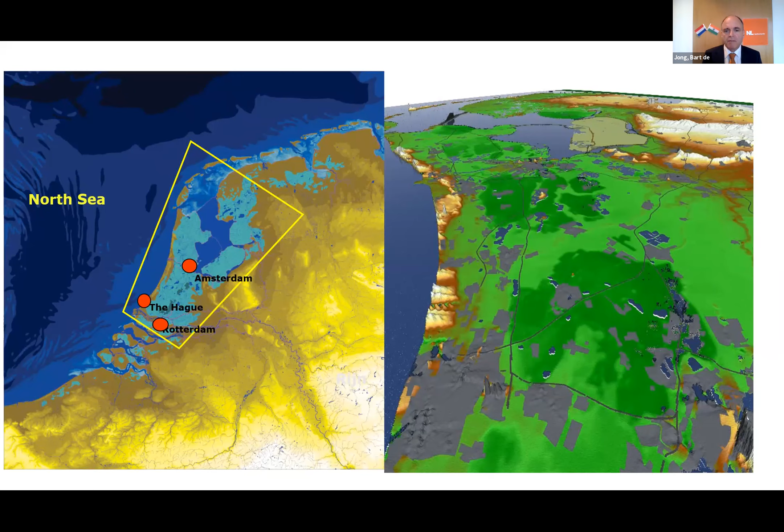As I said, the blue areas are below sea level. And if you see in the next slide what our country would look like if we hadn't done sea defenses for over 1,000 years - we've been doing that for over 1,000 years - the country would look like this. It would be flooded for one third of the country. That is an alarming notion, of course, but the thing is, it's not flooded.

So that means flood protection actually can work. And you're going to hear all about the way we've done that through the ages from various colleagues present here today.

I think we can move back to the main screen again, Ram. So if you see that picture, and add to that what the picture would actually be if we didn't have any flood defenses - climate change is exacerbating that problem, not only because of sea level rise, but also because we have much more rain falling in a very short period of time, and also because of higher river discharges. So we need to find solutions.

We had a major disaster in 1953. That was our last major flood, which cost about 2,000 people their lives. That was actually a turning point in our thinking about flood control. We started building these large infrastructural works, delta works we call them, that the Netherlands is known for.

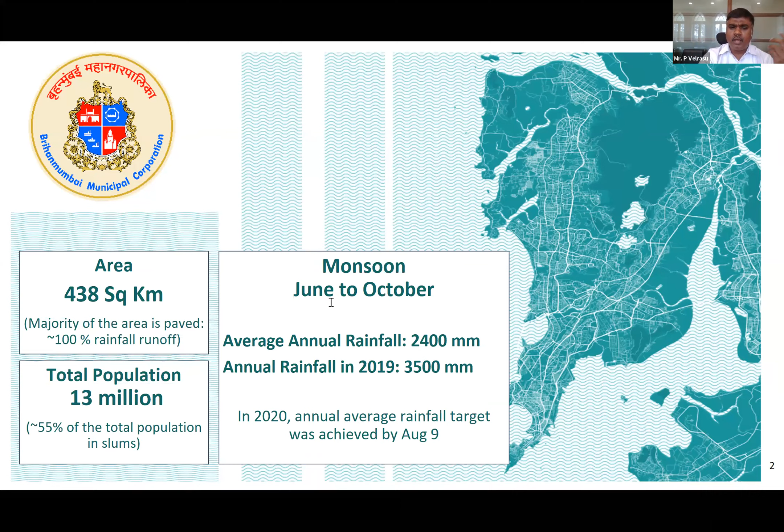We get a lot of our flood from the rains. The rains happen between June and October, and we get about 2400 millimeters of rainfall, sometimes up to 4000 millimeters. Incidentally, Mumbai is also reclaimed land because most of the places are filled up. Originally there were 6 islands, so the idea was we filled the land and formed a huge land mass. That is where the similarity with the Dutch lies.

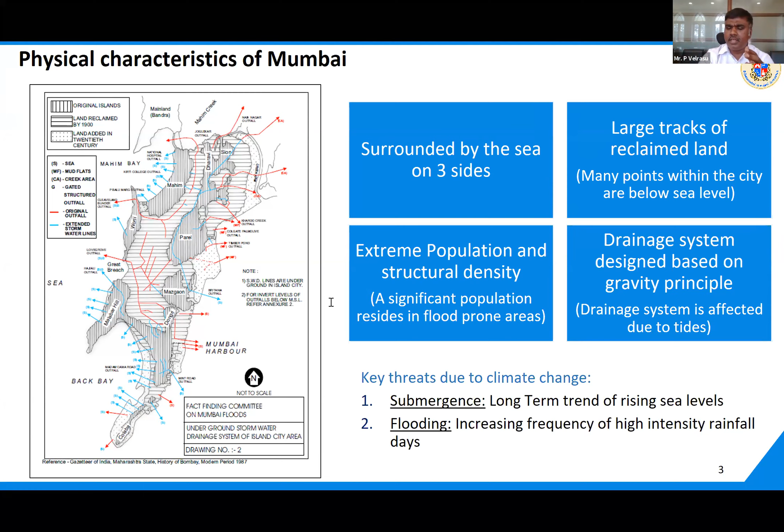If you see most of our water draining into the sea, these are all gravity based. Until recently, we have not put any pumping stations. So the Mumbai flooding problem is basically because of 4 rivers, and when these rivers drain water into the sea, if there is a high tide, the water doesn't drain and it floods the city. So we have 4 rivers, like you have the Rhine or Meuse and other rivers.

We have the Dahisar, Poisar, Oshiwara and Mithi rivers, and these drain water into the sea. If there is a low tide, there are no issues, but if the tide is high, the water doesn't discharge into the sea, creating flooding in the city. So this is a problem. Our systems have been designed only for 25 mm of rainfall in an hour.

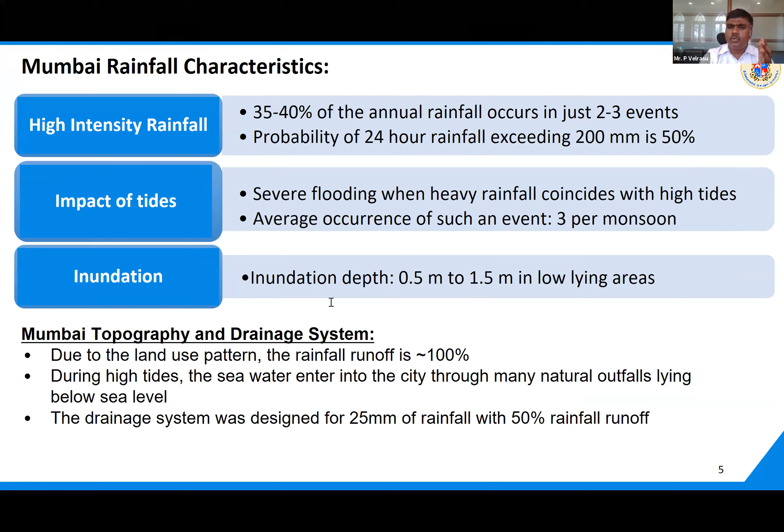Now, under global climate change, we see more than 200 millimeters of rainfall in 1 day. So basically our systems are under-designed for the kind of extreme events we are witnessing now. For example, last year we witnessed more than 200 mm of rainfall in a day, for more than 3 days. These are the extreme events happening due to global climate change, and our systems are not designed to handle those types of extreme events.

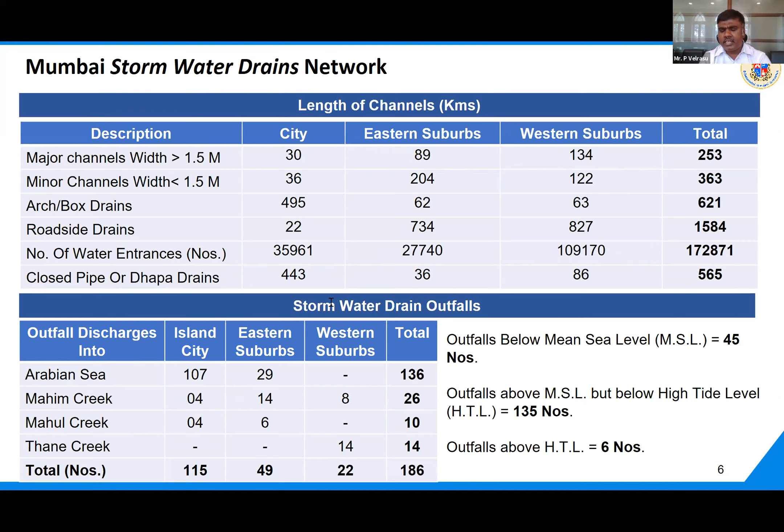Mumbai has a large number of channels which merge into the rivers, and the rivers get into the sea. We have about 186 outfalls, the drainage points, out of which, excepting 6, all other outfalls are below sea level. Meaning when the sea is full and there is a high tide situation, all these outfalls will not let the water go into the sea, so the city gets flooded.

So we had a plan with us in 1989, called the BRIMSTOWAD report. This is the base map on which we build our systems.

We assumed the runoff coefficient as 0.5, whereas in practice it is close to 1. So this was going on for some time.

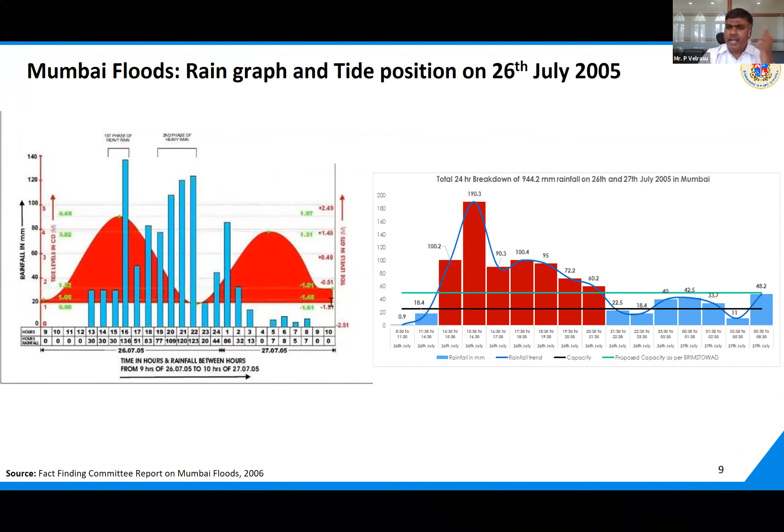Then in 2005 we faced a major flood, when extreme rainfall coincided with high tides. That day the whole of Mumbai went under water. Many people died, and everything came to a standstill.

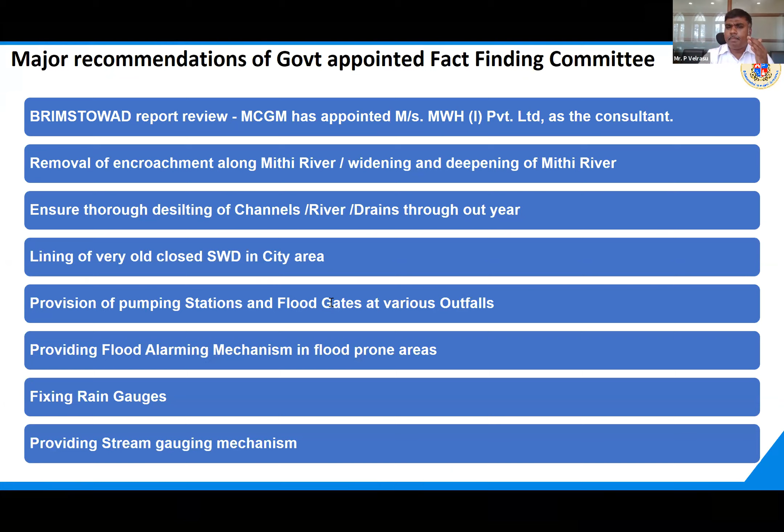So what happened then? The government, as usual, appointed a committee. Again we studied, and again the solutions were very normal: we had to widen the rivers, deepen the rivers, and remove the people occupying those banks. All these solutions were given, and these formed the base map on which we are working our solutions.

So this is how the methodology and all the details are there. But what we are seeing in the last 4 or 5 years is that extreme events are increasing in number. Five years back we didn't see much of these extreme events. Last year we got 3,500 millimeters of rainfall, almost twice the usual rainfall in Mumbai city, and on 3 days we had more than 200 mm of rainfall.

So all these events only strengthen the belief that in future, the risk because of climate change, as well as the rising sea level, is there for us to face.

So what we do: we have 6 huge pumping stations. When the sea water level is high, we put the floodgates up, but whatever water is getting collected from the rainfall, we pump out into the sea. So we have 6 places.

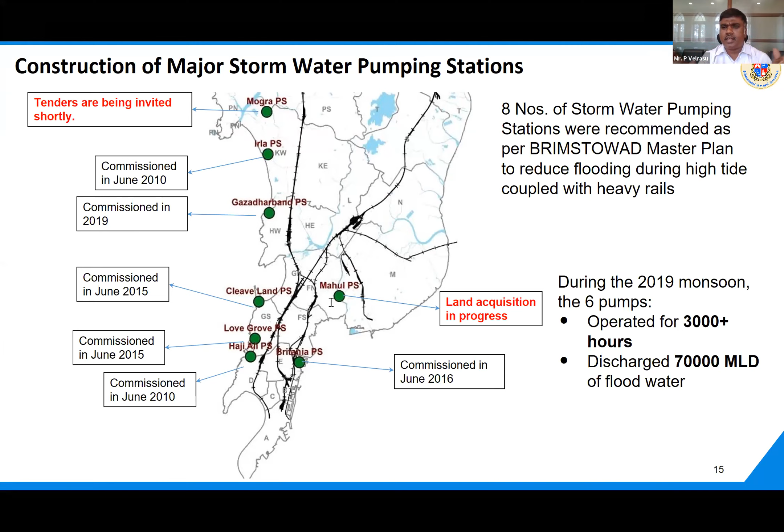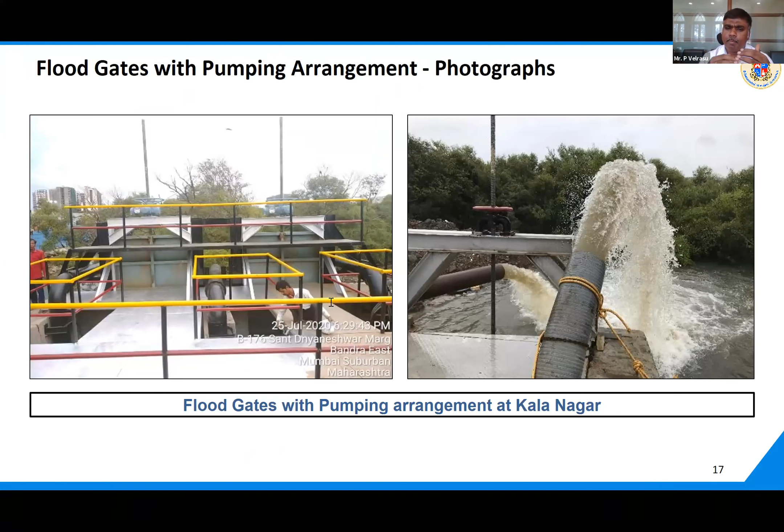It is already in working stage. 2 places we are yet to construct. So to say, these are like our delta structures — for our scale, even though they may be small. So these are the pumping stations, and at many outfalls we put these flood gate type arrangements to pump out the water into the river and into the sea.

And every year we remove almost 500,000 metric tons of silt from the rivers and other big channels to have a good flow into the sea. This we regularly do.

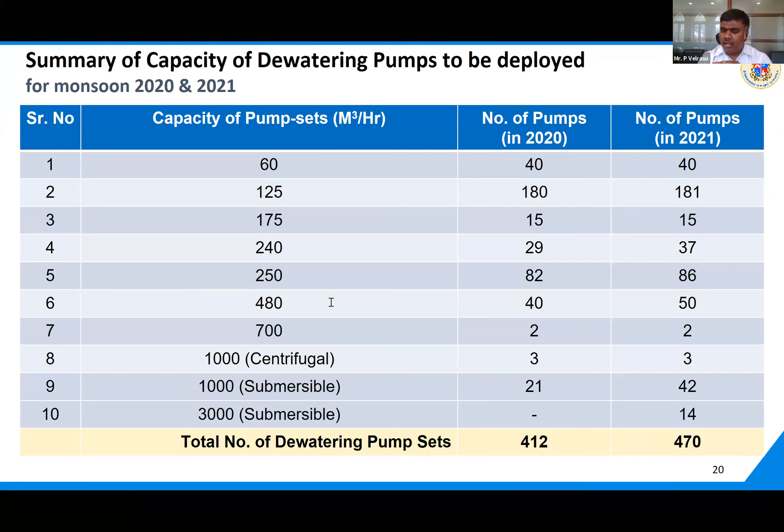Then, in spite of all this work, we have about 400 points that are lower than sea level. We get water stagnant here, so we have to put pumps and discharge the water into the nearby channels and rivers. That also we do.

So in spite of that, we have about 400 small flooding spots in different parts of the city. Every monsoon it happens. We have already tackled about 170 places using engineering solutions, and the remaining places are in different stages of tackling.

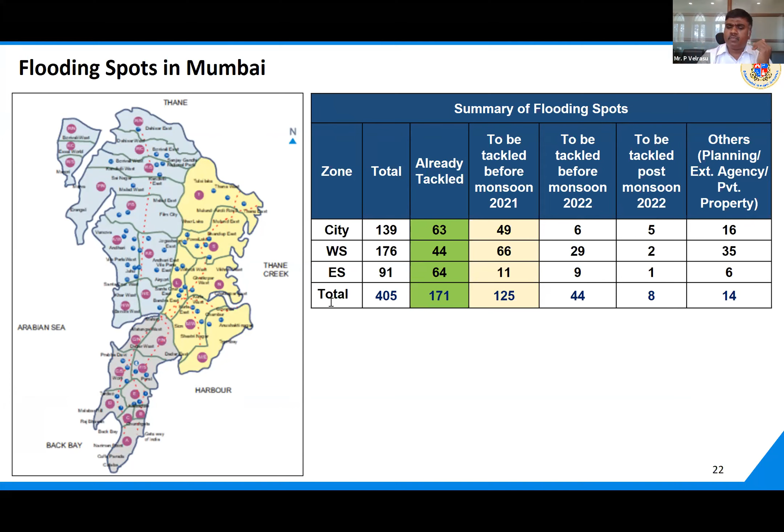Now this is based on the Tokyo tunnel model. Here, these are some chronic spots where we are building huge underground floodwater holding tanks. This is the first time we are doing this, this year. We have taken this work in 2 places on a pilot basis — we want to execute in 2 locations and learn from this.

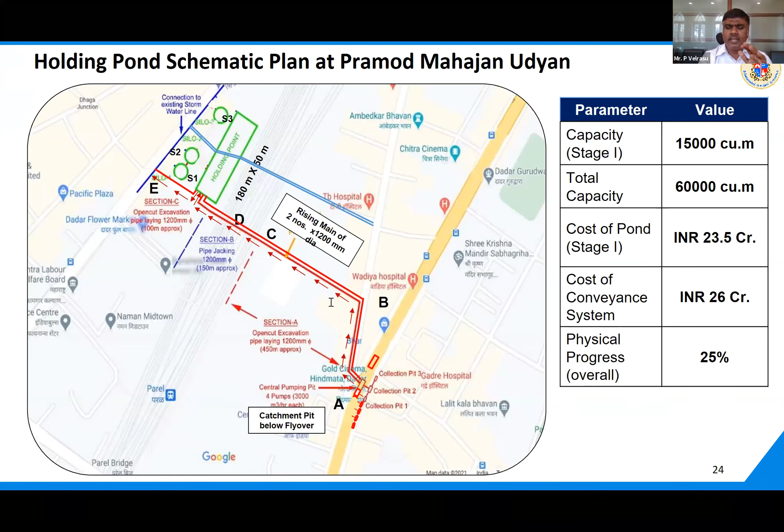One is the Hindmata area. We will be pumping out the water to a holding pond, and during low tide we will be emptying it into the sea. This is the other side of the same place. The work is in progress.

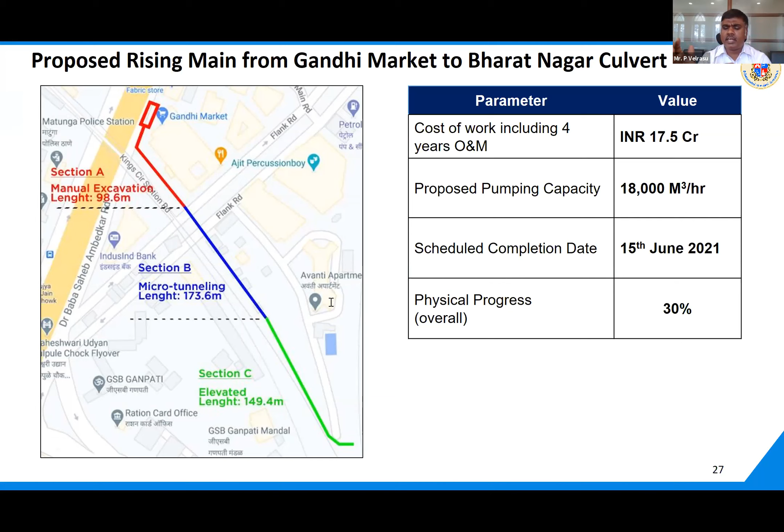This is another place called Gandhi Market. For the last 20 years this place has been a perennial water-logging area. This year we have put a huge sump here; we will be putting huge pumps and pumping out the water to the nearby channel. This work we have undertaken.

Now some issues would be different from what is in the Netherlands versus Mumbai. I will close with these issues. Here, the total funding of all these works comes from the government. There is no tax collected from people for this work. There are no local water boards, there are no local structures. Unlike the Netherlands, where you have lots of water boards and can, by act, collect tax from people for the upkeep of dikes and other structures, we don't have any such system currently.

But flooding is a very politically sensitive issue. Even though it is sensitive, it is human nature — people don't want to vacate the banks of the river. Like the Room for River project where you shifted people out, that might not be so easy here, because the occupation is so dense in the informal structures we call slums.

They don't want to vacate those places, so the widening and deepening of rivers is very difficult. And unlike Netherlands, here the floods are of very short duration. Even with huge rainfall and a flood situation, it is there only for 2 to 3 days, then normalcy comes back. So we are not pushed to the wall to put anti-flooding structures in a massive way. The short duration floods are, in a way, a limitation.

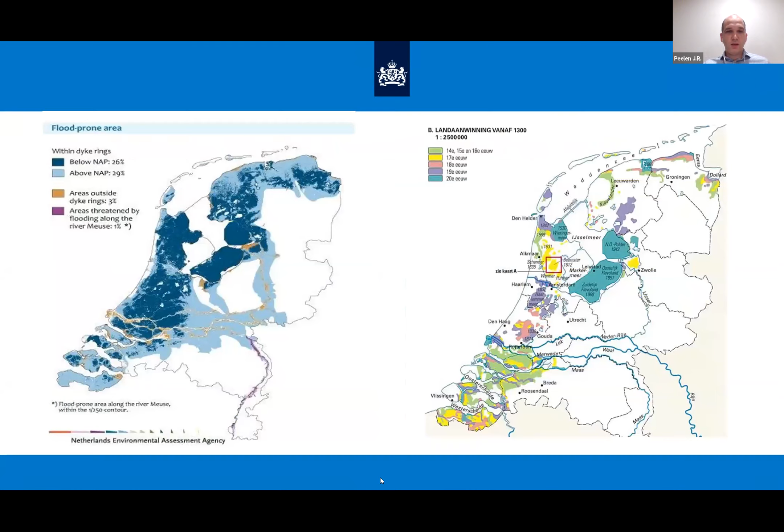This was a multi-decade, multi-billion dollar project. We started planning it in the 1950s after the big flood, and actually finished this particular structure in the early 1990s. Even in Mumbai, everybody knows the Dutch Delta Works, and the American Society of Civil Engineers called it one of the modern wonders of the world. So when we finished this, you can expect that we were pretty pleased with ourselves, thinking our country was safe again.

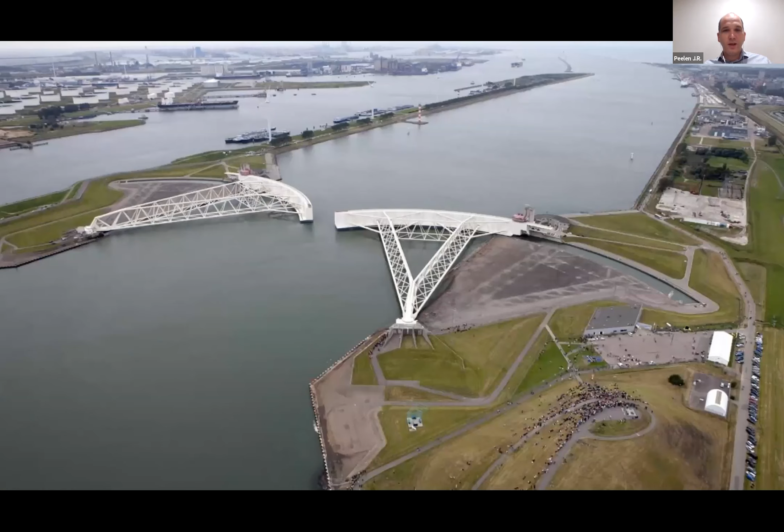Nobody died, but still it was quite massive. Also, the weather patterns are changing. We have more intense rainfall. Especially compared to Mumbai, we have a very moderate climate, but it's changing, and we get these very intense rainfalls now. The same river that led to the surfer using the highway a couple of years ago, we actually have droughts now.

So for us, the country that has a history of keeping the water out, we now have to start thinking about keeping the water in, because we need the water for drinking water, for cooling water, for energy, but also for our many maritime activities. We use the rivers for transportation.

So how are we going to manage all these new challenges that we get from climate change? And more importantly, how do we deal with the uncertainty? Because we know that the sea level is going to rise, we know that our country is subsiding, we know that we're getting more extreme weather, but we don't know how bad it will be in 10 years, in 20 years, let alone in 100 years.

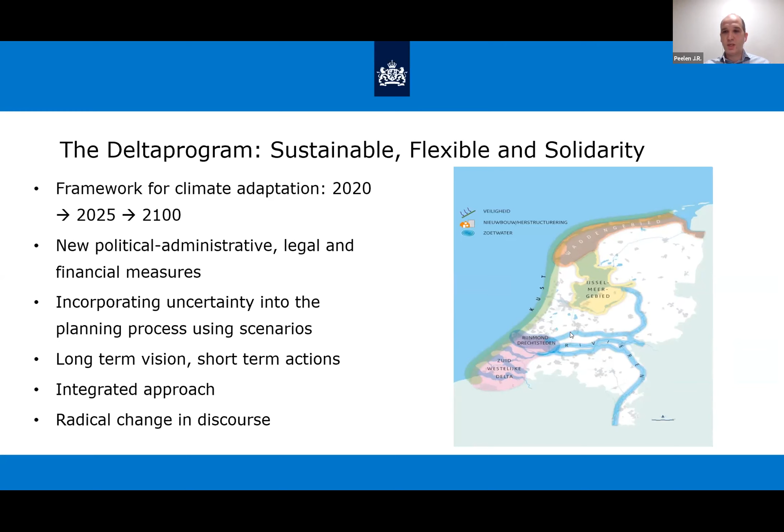So a couple of examples of projects that really showcase the new way of thinking. This is a coastal project protecting the popular beach town of Scheveningen. We know that through sea level rise, we had to build a new kind of levee in this area. But the problem is it would be a very high seawall.

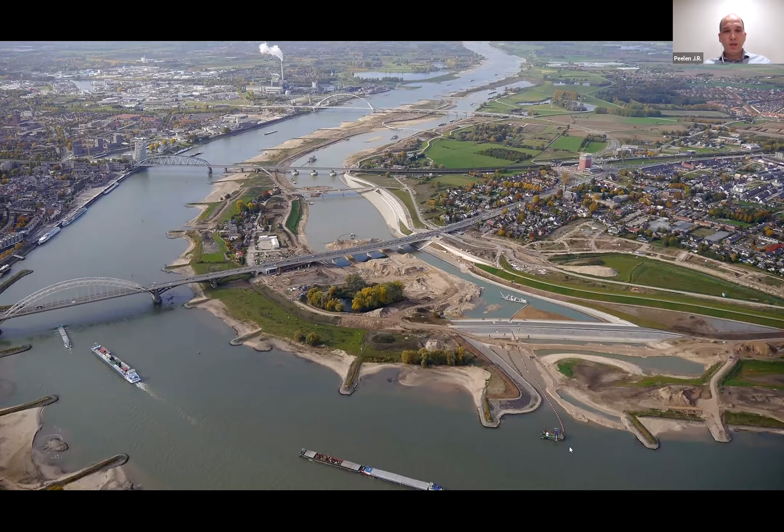We actually created a whole new part of the city, a part of the city that people use. Again, this is not about preventing this 1-in-so-many-years event. It's also about creating added value for all the other years that you don't have to use it.

And that's the same thing we do at big scale. Those are big scale projects. We also try to do it on small scale. This is in Rotterdam, one of our cities that's really leading on resilience.

So that's the general idea and some practical projects. We already talked about these events in the previous presentations, about the concept of floodplains, these 1-in-100-year events, 1-in-10,000-year events. The way we talk about risk is actually one of the big problems in handling this.

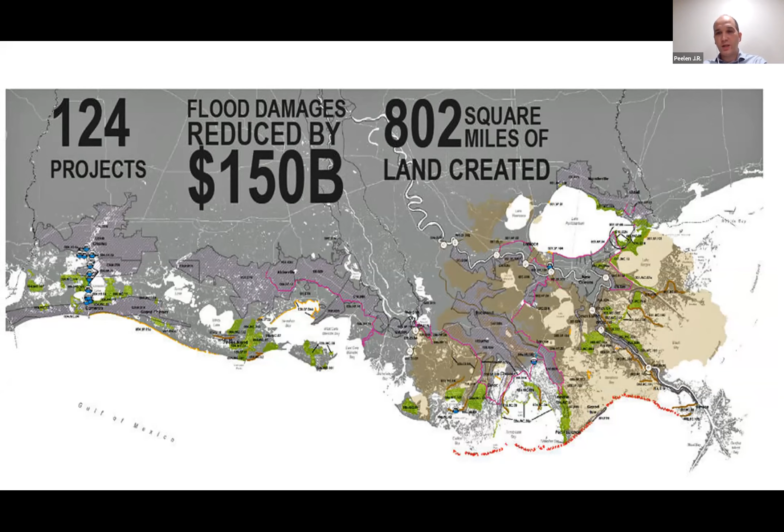They actually learned from us - we've been in exchange with them for a couple of years now, and they really adapted our way of thinking, but in a style that fits Louisiana. So they created their entire own climate adaptation project. They have 124 projects, their flood damage is severely reduced, and they're actually reclaiming land right now. This shows that you can learn from the Netherlands, but you really have to make it your own, not copy us. We can help you, inspire you, but you really have to make a system that fits, in this case, Mumbai.

And then the Dutch perspective, my summary. Climate change is not something of tomorrow. It's already here now in the shape of events, but also the fact, like you saw in your presentation, that you're already touching your annual average in August, and you still have a couple of months of monsoon left. And not just events, but there's a new normal - not just these once in a lifetime or once in a 50-year events. It's the new normal, and we as communities all need to redefine our relationship with water through that.

And that can be very different. The problem is in Mumbai, that relationship will be completely different than somebody in New Delhi. So the approach to this is really, really regional.

And the problem is that our current government models, our current business models usually don't really help us. They have not been designed to tackle these kinds of issues. They're often sluggish to change, or they resist change because of established interests, or for politicians it's really often very scary to communicate these uncertainties, or have, for example, the displacement of people. Sometimes it's really necessary, but nobody really likes that message.

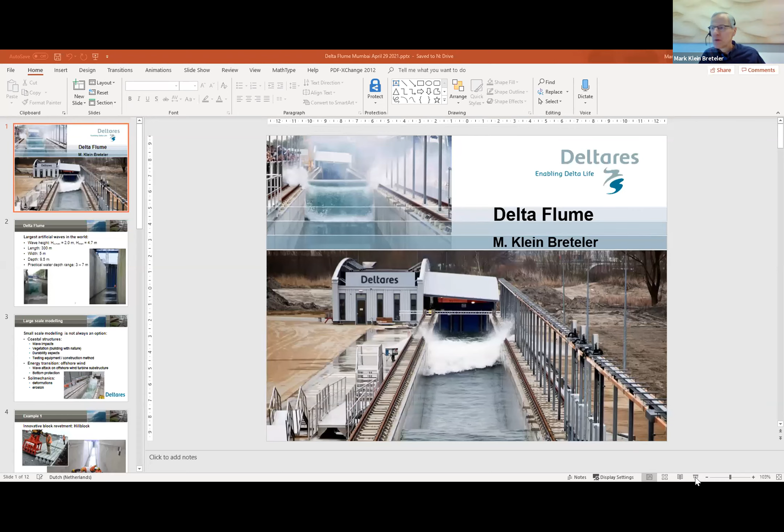Yes, thank you for this introduction. I will now share my screen. I assume that you're now seeing it, and I will go to full screen. Yes, okay. So my name is Mark Klein Breteler. I'm a project leader at the Delta Flume of Deltares in Delft. And I have a short presentation about this Delta Flume, which is a powerful tool to support innovations for flood management.

The Flume is capable of generating the largest waves in the world. We can generate a significant wave height of 2 meters, but that's a sort of average value. Our largest wave is 4.7 meters high, which is 2 stories - really gigantic if that's running through the Flume and hitting a structure. The length of the Flume is 300 meters, the depth is 9.5 meters. And you see some pictures here - it's really huge.

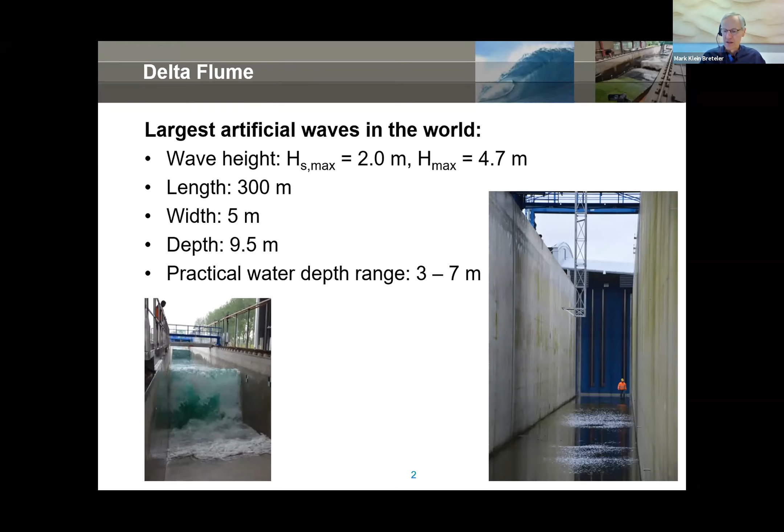Usually you do small scale modeling if you want to solve a problem with experimental research, but it's not always possible to use small scale modeling. Sometimes you have to go large scale, on the scale of the Delta Flume.

For example, for coastal structures or river embankments of large rivers, you have to cope with wave impacts.

Wave impacts are also influenced by scale effects because of the air bubbles that are entrained in the water.

But also with other topics like researching vegetation, the influence of vegetation on coastal structures or rivers.

That is aligned with building with nature.

Durability aspects can also be researched here, along with testing equipment and construction methods.

In the energy transition, we nowadays do a lot of work on offshore wind turbines, and wave attack on offshore wind turbines, especially the substructure, is influenced by scale effects. So there you go large scale.

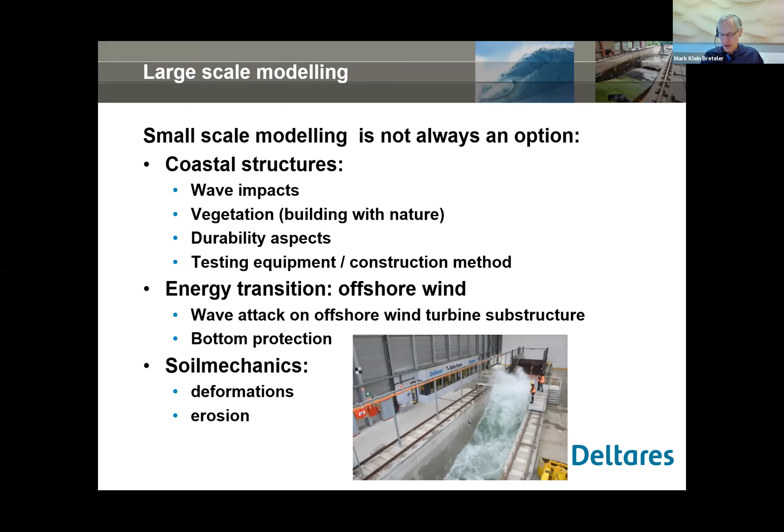Well, I have a number of examples to show what we do in our Delta Flume.

This is example number one. It's an innovative block revetment called Hillblock, which we developed together with a client. Because of this special shape of the concrete block, we only need half the amount of concrete to withstand certain wave conditions.

This is typically used to pave the embankments of large lakes or along the coast to withstand the wave attack on the embankment or the dike.

That development was very successful for this private company, and by doing those tests in the Delta Flume, we could show that it really works well.

It also attracted a lot of media attention. We invited potential clients for this private company, and that gave a huge boost to the market introduction of this system. It worked very well in the Delta Flume.

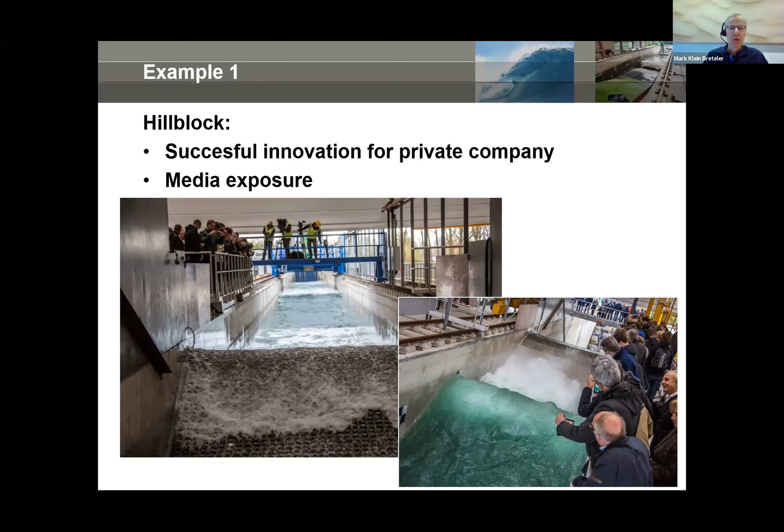Another example is what we did for a client in Australia, who invented a fiber reinforced polymer sheet pile wall. Sheet pile walls are normally constructed with steel, which is very stiff, but this one is very flexible.

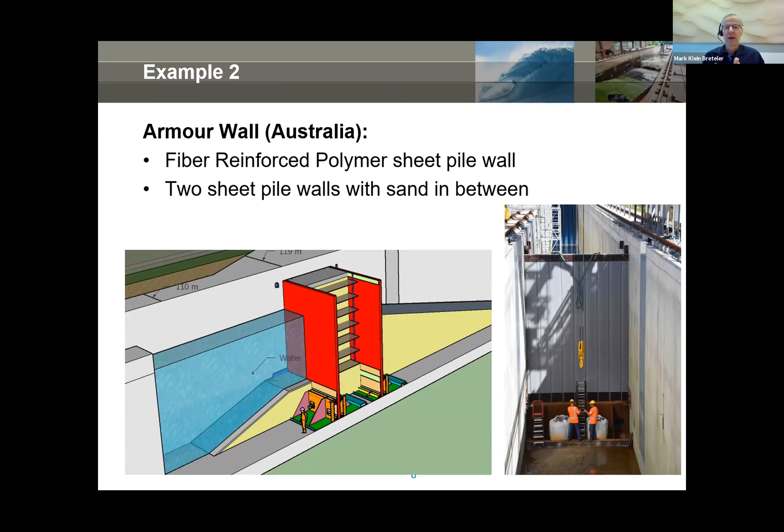With two of these sheet pile walls with sand in between, you have a water defense, and we tested that in the Delta Flume.

We started with normal waves, but they reflect off the structure and there's not much force on it, so that was quite easy for the structure. Then we took it to the next level.

The 300-ton structure was pushed back 14 centimeters, which shows that these forces are really tremendous.

But on the other hand, it also shows the flexibility of the structure. It didn't collapse. This structure just withstood these enormous forces magnificently.

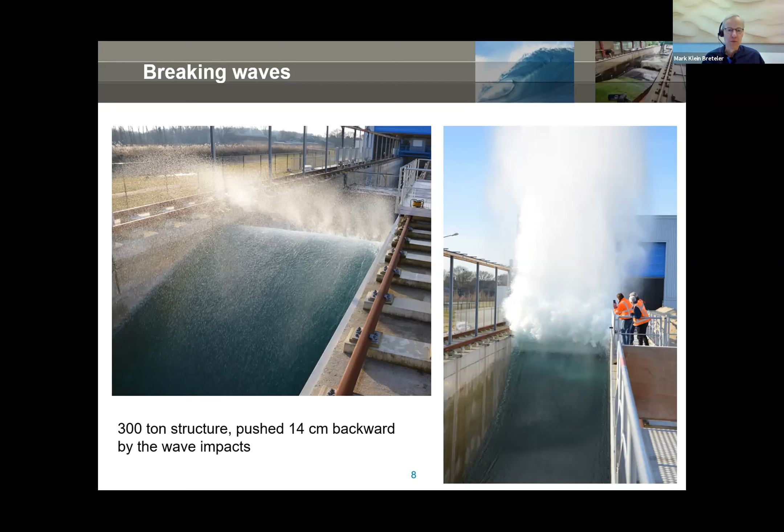Here we are investigating the erosion of that material. It's typically something you cannot do on small scale, because clay cannot be scaled and neither can the grass.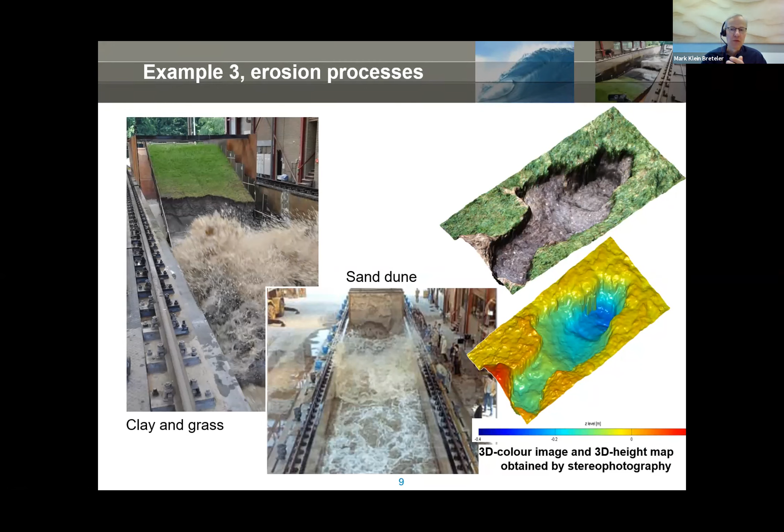But we are building so many of those in the North Sea, and around the world, that it is important to have an efficient way of protecting the bottom around the offshore wind turbine.

That is what we investigated here.

My last example here is willow trees. We have been testing a forest of willow trees in front of a water defense. The idea is that waves have to propagate through the forest, so the wave height is reduced, and the water defense is attacked by much smaller waves than without the forest. This is a typical example of building with nature. We use a nice forest that can be used for recreational purposes throughout the year, but on those very rare events with high water, it serves as a breakwater for our water defense. That can be used with willows, which is a typical tree in the Netherlands.

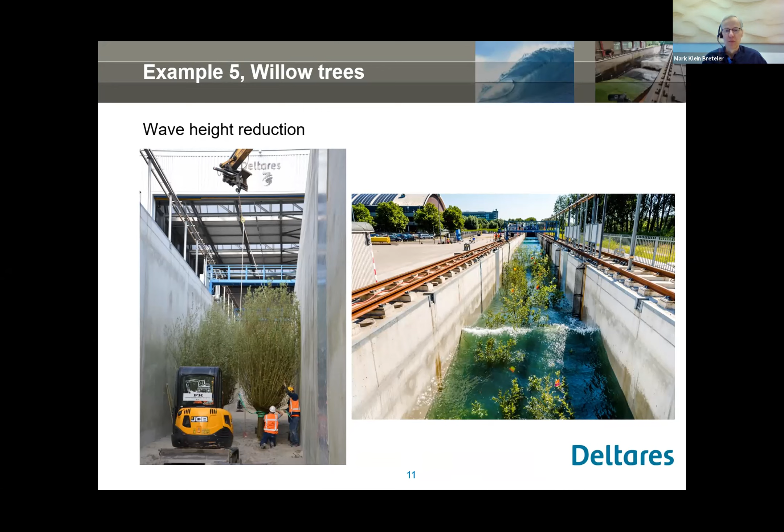But translating that to tropical areas, you can use mangrove forests, which are quite common in tropical areas, but are endangered because of all kinds of human activities. These forests are endangered, and that is why we have investigated this.

So looking back on these examples, you can see that the Delta Flume is a versatile tool to support innovation. If there are questions, I'm happy to answer them, but this finishes my presentation. Thank you.

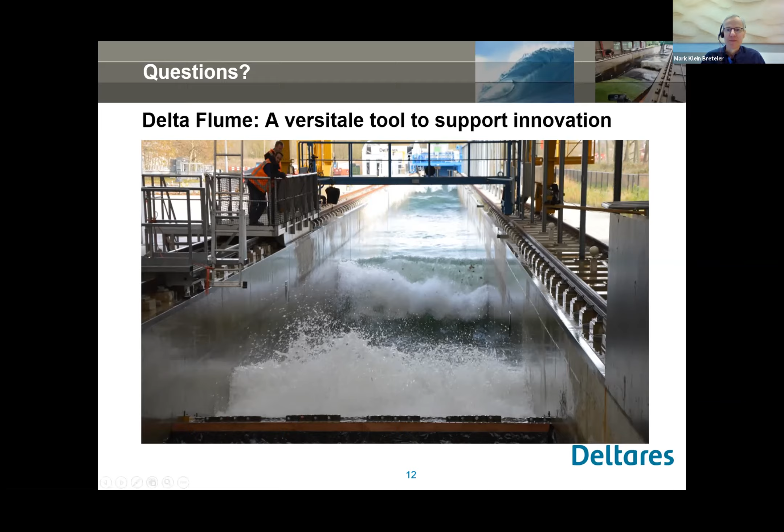It has come from Mr. Ian Peelan, I think. The question is from one of the attendees: what is the method followed by you for early warning of any incident?

The question is, what is the method followed for an early warning system in the Netherlands? Yes, well, we have a whole system of early warning that is basically organized by the government. We have a location in Lelystad where weather forecasts are looked into, and when there is a huge storm coming up or large river discharges coming up, we gradually scale up our response. In the ultimate upscaling, we have people watching our dikes and calculating possible scenarios of events so that we can decide whether we have to evacuate people or not. That is a whole system which is also tested now and then. Every one or two years we have a big training campaign where many people involved in this system train for events of high water or similar things.

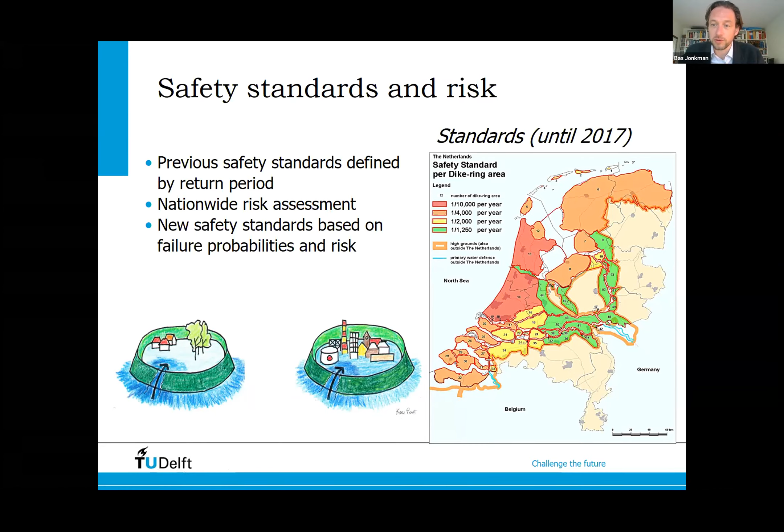These standards have been developed in the 1960s and 1970s. Since then, the values that are protected have grown a lot, and also the knowledge about the risks, both the consequences and the levee failure probabilities, have also increased.

So what has happened is that over the last decade, a nationwide risk assessment has been carried out, indicating both for loss of life and economic damages where the greatest risks are found in the country. You get maps like these that show the individual risk, the individual probability of being killed due to flooding, which are particularly high in the riverine areas because they are deep and because the failure probabilities of those riverine floodings.

Were expected to be high. And what has been done based on all this information is also a cost-benefit analysis of the costs of higher protection and the economic risk reduction. A whole new series of safety standards has been proposed with different values.

Even going up to greater values of protection, 1 in 30,000. Also more differentiations, so if there are lower consequences, a lower value can be picked. And here also, maybe more technical, the concept of probabilistic design of failure probabilities has been embraced. So this number refers to the failure probability that a section of embankment or dike should have. This is the new standard that dike designers and authorities work with in assessing and designing reinforcements.

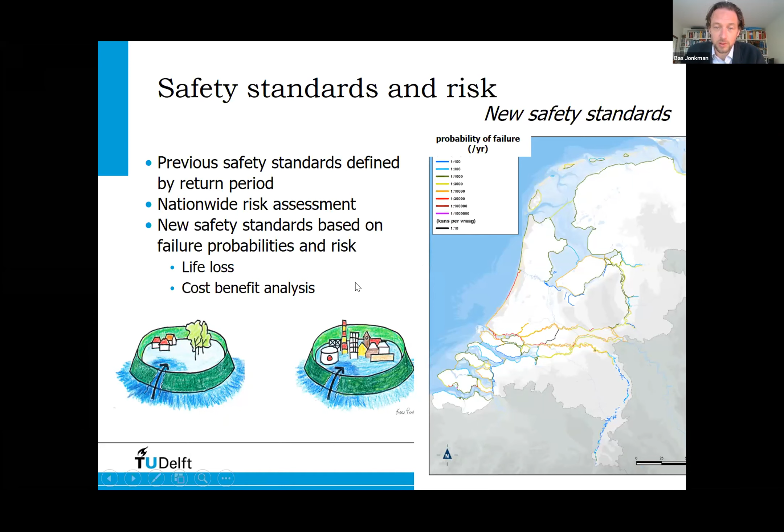You see around the world that in areas like Shanghai, where they expect from coastal flooding also billions of damages, they are also moving to higher safety standards. In Singapore, where they are doing land reclamation and where they are quite risk averse, they also are moving to higher safety standards. But in many parts of the world, indeed, 1 in 100 is the standard. One interesting aspect could be to carry out such a risk or cost-benefit analysis to see what could be adequate levels of protection included in the standards.

This has already been largely explained by Mr. Jan Pele, but we have a large amount of defenses. Every 6 to 12 years, they are inspected or assessed to see if they're still safe enough. I think the good thing is that in the Netherlands we have this kind of national program with over €1 billion per year to continuously invest in reinforcements, not in a single project in one year, but over time—if you continue doing that for decades, you can upgrade the system.

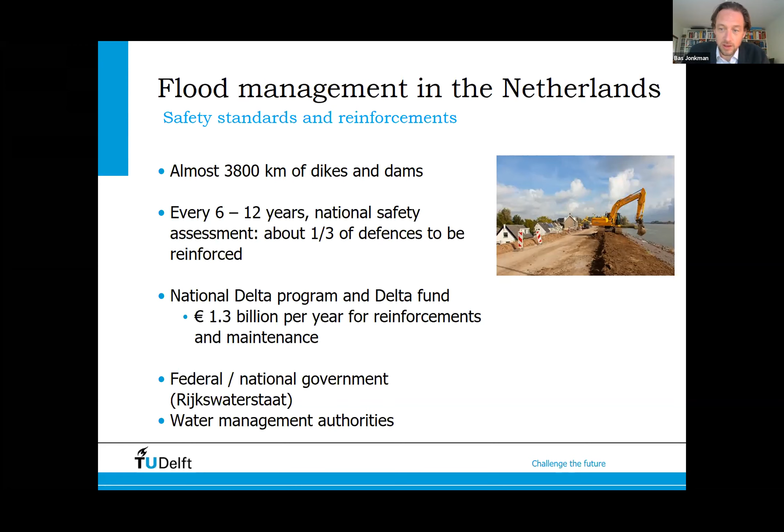What are the kind of trends in these projects? On the coastal side, we see more and more attention, where possible, for nature-based solutions. One of the more recent examples was one of these coastal dikes, which used to be a hard defense and has now been changed into a dune landscape with a lot of dredging, of course, on the coast, but it's still the same area.

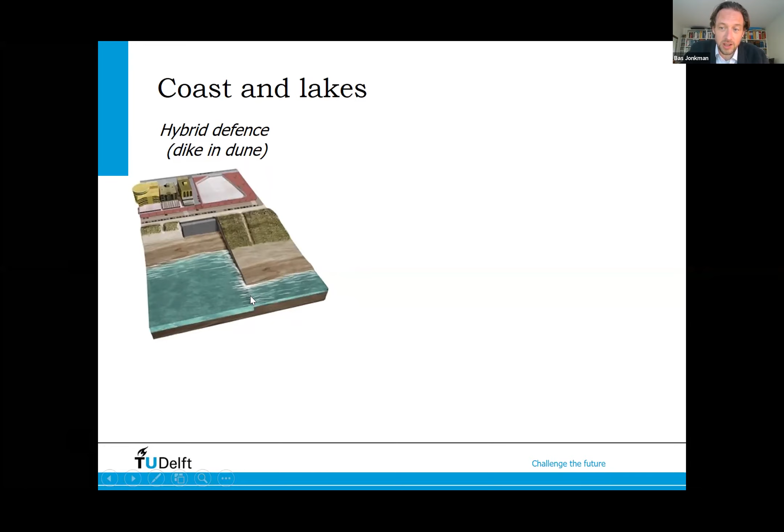Also multifunctional solutions, or combined hybrid solutions, where a hard dike, this in Noordwijk, is covered by means of a dune. The previous presenter showed the delta flume, which is typically needed to test these types of designs and how they function.

Also more and more attention for landscape implementation, both in urban and rural environments, which leads to multifunctional projects where in Katwijk, the parking garage is connected to the sea defense and implemented in the town. This is an example of a hybrid solution where an existing dam in a lake environment is particularly reinforced over a large area by means of foreshore nourishment.

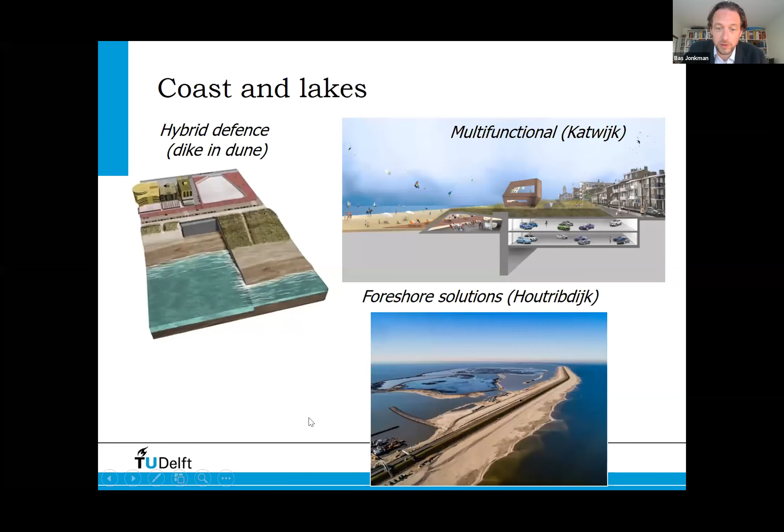I know that in Mumbai there are plans or work ongoing on the coastal highway, and there may be combinations with nature-based features or multifunctional features that could also be of interest.

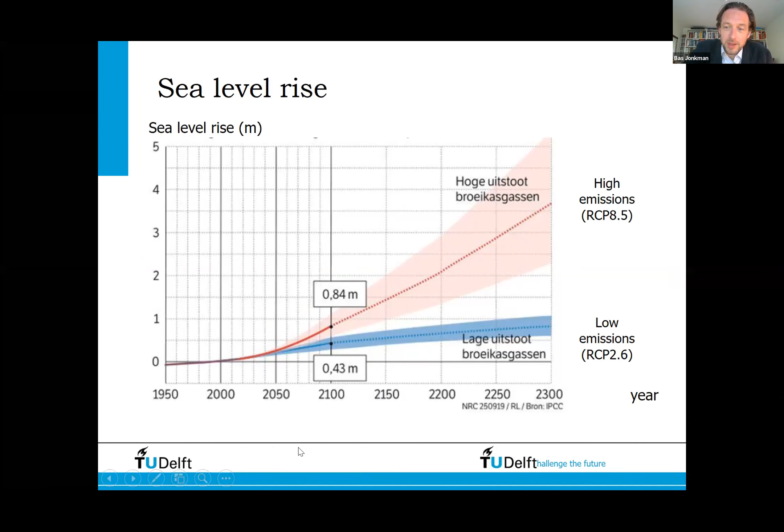Then there's the question of how to deal with and think about sea level rise, and you can talk about that for a long time. A recap of various previous assessments we did with groups of experts is as follows. On the horizontal axis, you see the time; on the vertical axis, the sea level rise in meters.

In the low emission scenario, it would stay up to 1 meter, which is probably less expected. In the high emission scenario, it would go anywhere between 2.5 and 5 meters. In the current system of defenses, a margin is generally included of up to 0.5 or 1 meter of sea level rise as one of the design margins.

So in general, the current system can cope with about 1 meter of sea level rise. Above that, the first bottlenecks will emerge, particularly at movable barriers and gates, like the Maeslant barrier, which will have to close more frequently, causing reliability problems and impact on shipping - a similar story for the Eastern Scheldt, but there the impact is on nature. So those are the first issues, and plans have to be made.

What are the solutions that can be used then? Even a closed dam with sluices for shipping.

For several meters of sea level rise, from an engineering and financial point of view, we expect it's possible to adapt defenses, both rivers and coast, and to upscale nourishment, also considering the sand supply. But it will come at a high cost and high societal impact, also because of the construction works and the footprint of those defenses. So it's definitely a large project.

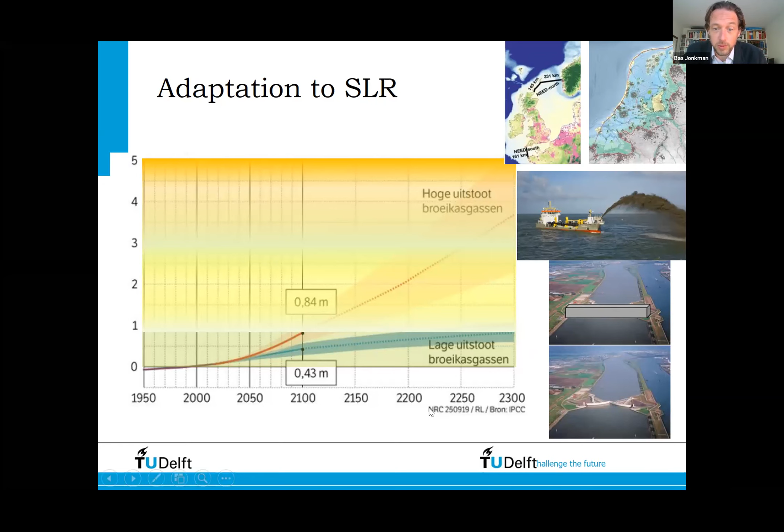Internationally, we see that all these mega cities are growing further in delta areas, and that is also why, to sharpen our own knowledge, we work together with international partners on these issues.

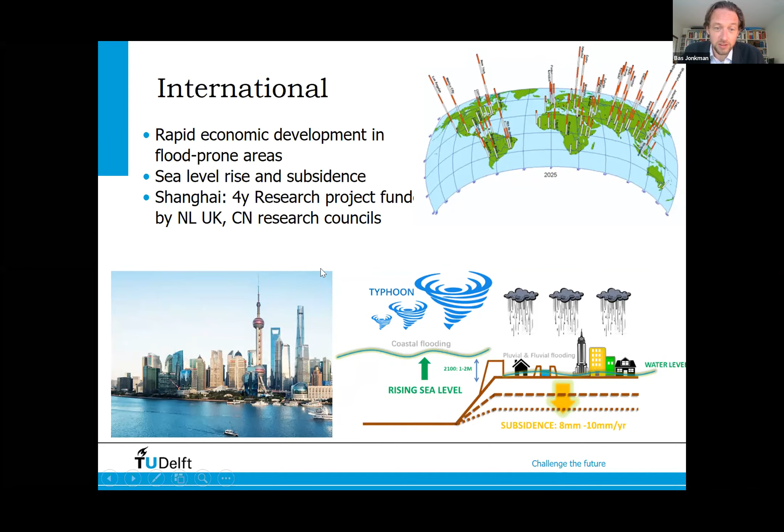We've just completed a 4-year research project funded by the Dutch, Chinese and UK science councils on building a whole risk modeling and adaptation framework, coupling climate models, embankment failure models, flooding models, and adaptation options for the city of Shanghai. Well, I say city, but it's actually the size of our country in terms of population.

One area where we are particularly active is Texas, the area around Houston, which is also prone to flooding from hurricanes and heavy rainfall. It was affected relatively recently by enormous amounts of rainfall, up to over 1,000 millimeters in one event, mainly river flooding, but also in Hurricane Ike in 2008, coastal flooding. So they have both problems, maybe even simultaneously.

Over the last years, with our students and knowledge partners there, we've worked on designing the Texas version of the Dutch Delta Works. That's of course only one of the options for this region, covering sand dunes and plans for storm surge barriers to keep the port of Houston accessible.

A few closing remarks. As already stated, flood management is essential for the Netherlands. It's a continuous task, continuous investment, but also continuous knowledge development. This risk-based approach is really useful for having discussions or updating safety standards, but also for prioritizing projects where you have the greatest risk or greatest contribution to risk reduction. Those would be the most interesting projects.

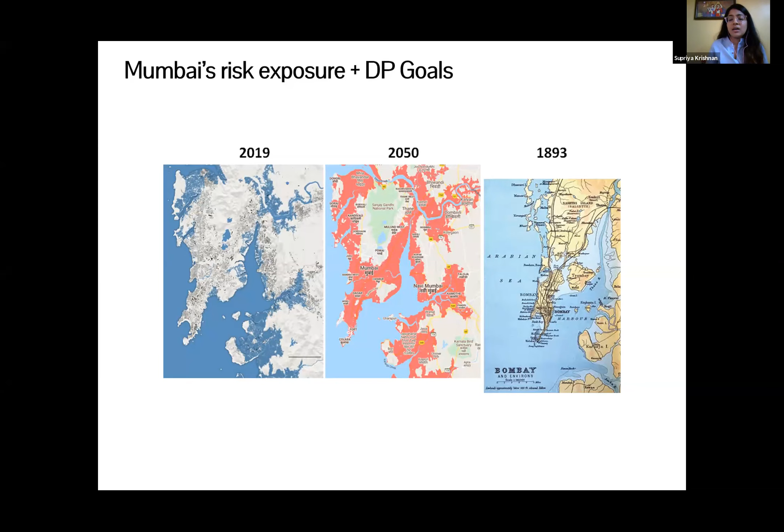However, as we already saw in Sir's earlier presentation, the on-ground complexity for bringing in any form of structural changes, in the form of, let's say, bringing in room for the river, a seawall, nature-based solutions in the city of Mumbai - the complexity that's already on ground in terms of the densities is significantly higher. There is extremely little room for adjustment spatially to bring in new things or to rejuvenate new things.

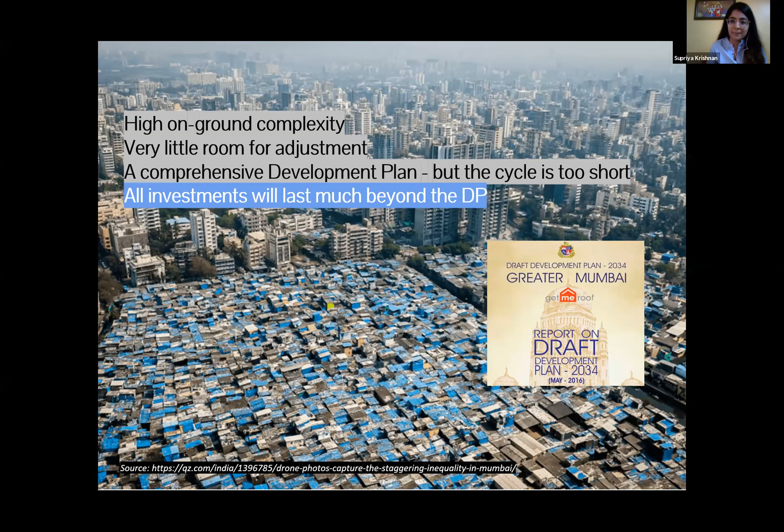The development planning cycle, although it is 20 years long, is relatively shorter to really bring in these kinds of long-term considerations of climate that's changing far more rapidly. And all investments that we are making in the city at this point, be it the metro, the coastal road, the developments around the metro, the changes in FSI, are going to last much beyond the cycle of the development plan. So, in such a situation, what the PhD research is trying to look at is what the future of the city Mumbai will look like.

In that, we look at three main aspects. Number one is how climate change is impacting Mumbai's urban growth over the next 20, 50, or 100 years. How can the city densify or re-densify? And how do we make sure that in the face of such rapid changes, the high investment areas do not coincide with the high risk areas?

So a disclaimer here is we are not trying to make a master plan for 2100 for Mumbai, but we are trying to make a framework that can guide a more informed short-term master plan that can be informed by longer-term climate simulations, such that we can move from a very fixed development plan that does work, but kind of move to a more adaptive form of development for Mumbai.

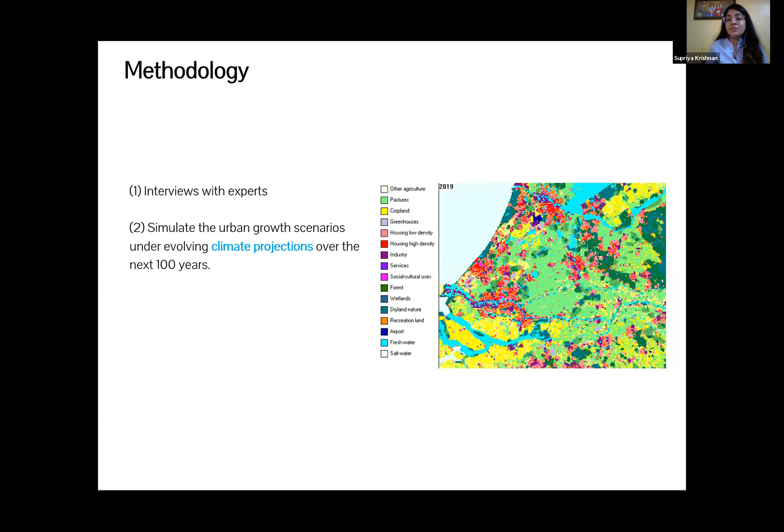And the second and more technical aspect of this research is we will be trying to simulate urban growth scenarios for Mumbai under changing climate projections over the next 100 years. And by climate projections, we would like to include the projections for sea level rise, temperature changes, flooding and inundation models as much as is available at this point.

So what we plan to do is over the next 80 years, for every 5 or 10 years, we would like to use these sets of models to generate something like a suitability map - what are the most conducive areas for development, where should development be avoided. So this is something that can augment the making of future development plans for the city, just to get a sense or get better evidence of where development should or should not happen.

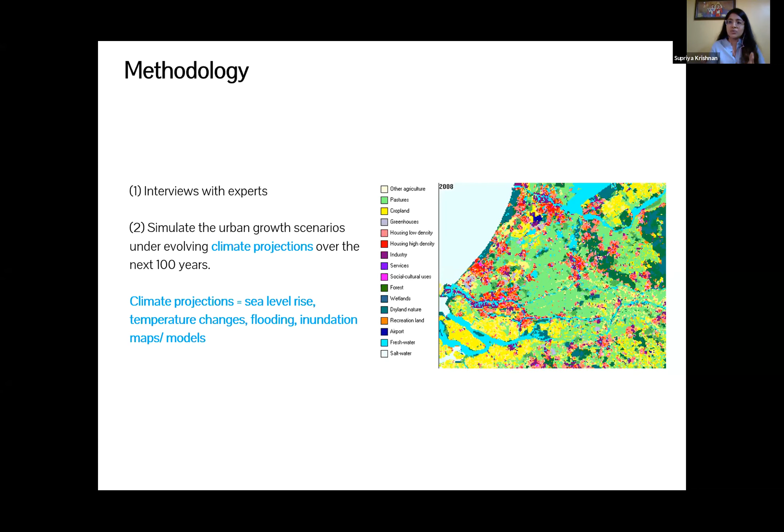This is a complex project, which is why collaboration with city officials and city researchers is really key. We have interviewed a lot of people, but lack of access to data is a big roadblock in conducting this type of research, which involves a heavy simulation modeling environment. So we are looking for land use, hazard maps, and inundation models available for the city.

We would like to interview more experts within the MCGM and MMRDA framework, especially those who work closely with disaster risk management and closely with planning decisions for the city. We are very open to project partnerships and joint case studies.

Early in 2022, when we have our first results from the models, we would like to conduct a technical feedback workshop together with some officials from the city. So that's the collaboration we are looking at right now. Yeah, so that's my presentation. Thank you.

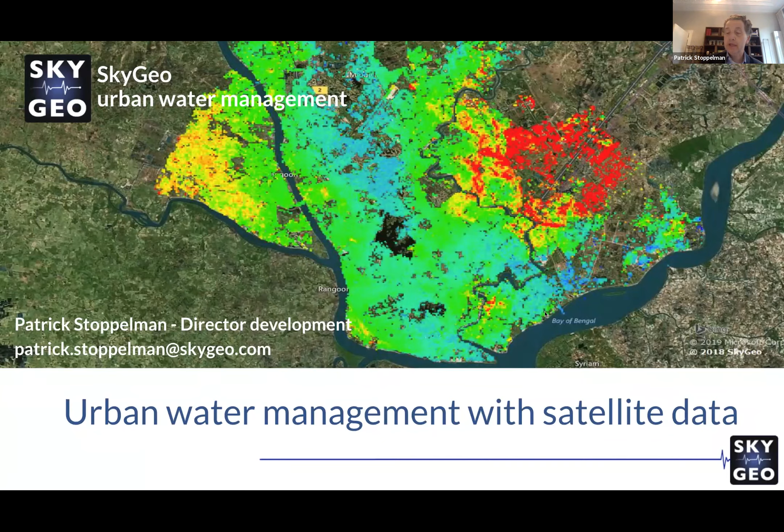What you see here, the background is Yangon. Let me go to the next slide. And here you see New Orleans. It came already, and we use INSAR, I will get back to that on the technology. And there's quite some interesting observations you can make.

On the left you see a red line, which is a levee, a dam to protect against the sea. It's apparently suffering from subsidence, as you can see the red color on the color map on the right top. Then in the middle you see something like a subsidence bowl, red, orange, and yellow. From the middle to the right, you see a bluish area. That has to do with a study we did together with a research institute, Deltares, related to groundwater uplift. So already in this one image, this one study, you can see there's a lot going on in an area in New Orleans.

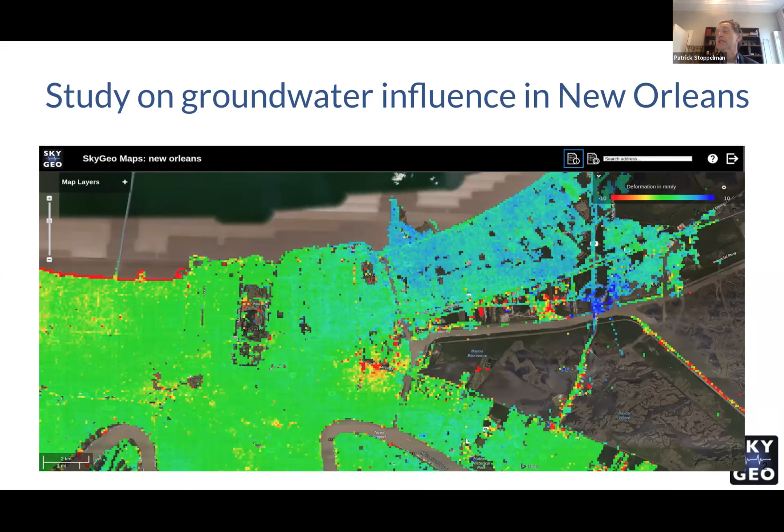Basically, we consist of INSAR specialists. Many of them have a PhD, and a lot of consultants with a master's degree. We consider ourselves to have geodetic DNA and a geodetic approach. The reason I underline this is there are quite a lot of companies that do INSAR with a big data or an IT focus, and we believe that the result is color dots, not a real result. Finally, we have our roots going back to Technical University of Delft, which gives us a link into the scientific world where we qualify new developments into our chain.

Just as a last one, civil, mining, these are the fields we work in: all kinds of civil object structures, mining, energy, government, focusing on national government, municipalities, water boards, and other organizations in between, and then international industries, as a summary of all the other activities.

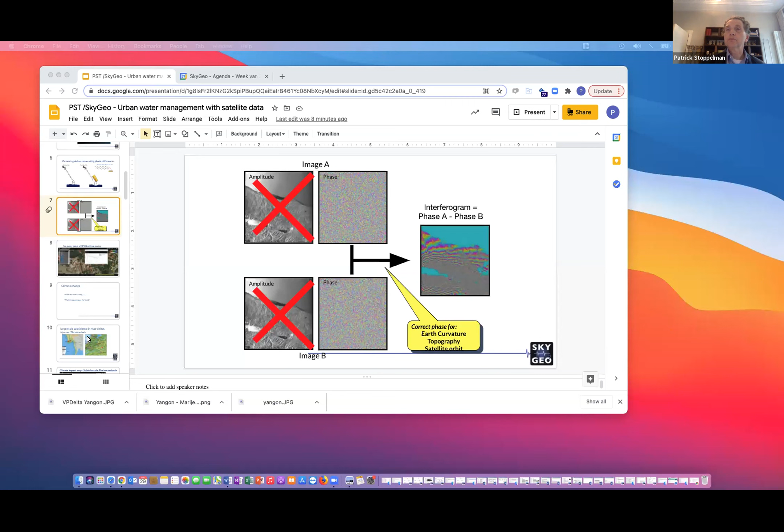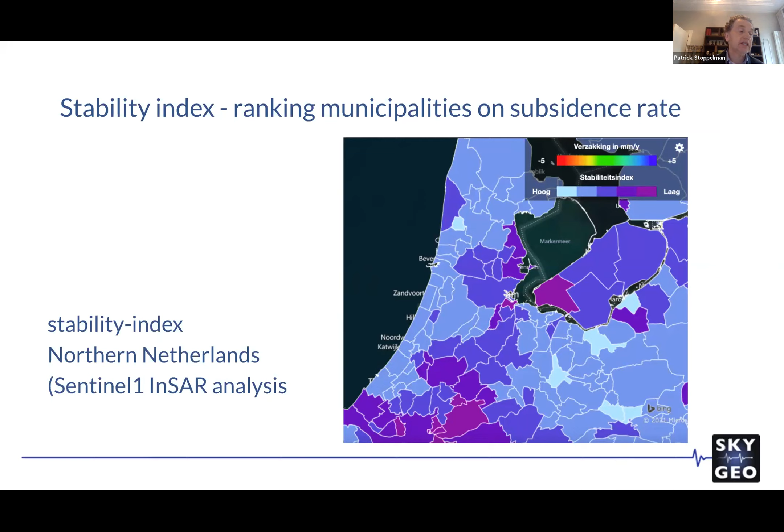Here, for the stability index, what we did was make a ranking of municipalities or counties, based simply on an average of subsidence rate. This is a first step to bring awareness to what's going on. Of course, these municipalities have themselves lots of information, but nevertheless, it's a first step to prioritize your work.

In this sheet, you see an example where we go deeper with InSAR, producing a map of subsidence to identify areas of concern. This also relates to what was mentioned earlier about underground tanks: where should we build them? If some parts of a city are going down faster than others, how does that happen and what do we need to do? Here you see two photos: one of rainfall issues where water no longer drains away, and another of our historical buildings, in this case a quay wall, suffering from these changes as well.

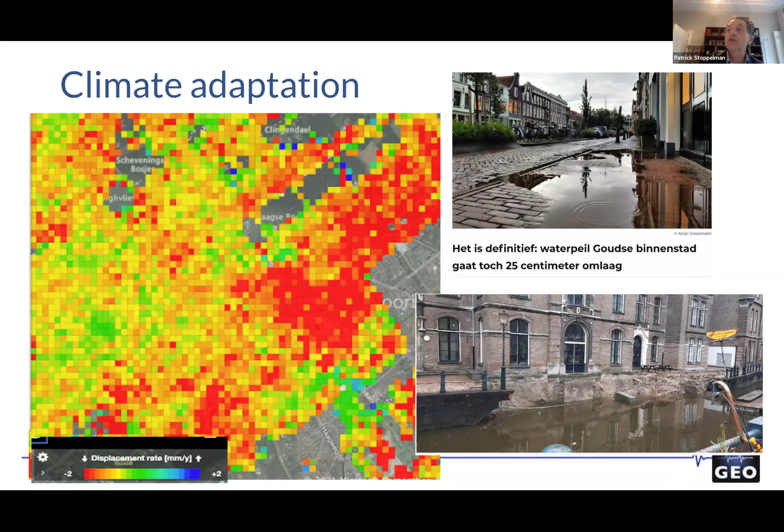Here is an example of a study we did for the municipality of Amsterdam, where we made a dashboard risk indicator for buildings. You see here a little photo of the historical buildings; they're all built on wooden pole foundations, going back 100, 200, 300, 400 years.

Climate change is changing the groundwater level and the growth of bacteria, and so these historical monuments are suffering from severe deterioration. In order to find out the scale of it, one of the ways to use it is InSAR, by satellites, to identify the subsidence of the buildings over shorter and longer periods.

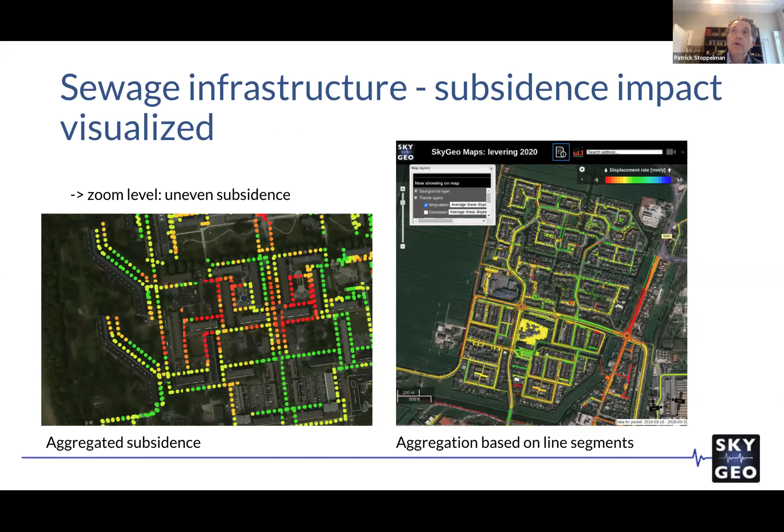This is another example where we are analyzing based on ground level and then using proxies for the underground infrastructure. Here we identify the subsidence impact on sewage infrastructure, and we have a very good system for sewage going back 100, 150 years. In order to help the municipalities and governments, we do this kind of analysis, and it tells you, in this study also on replacements, where to prioritize. Under the assumption that budgets are restricted, you need to find the spots that are worse, and this is a way to identify them.

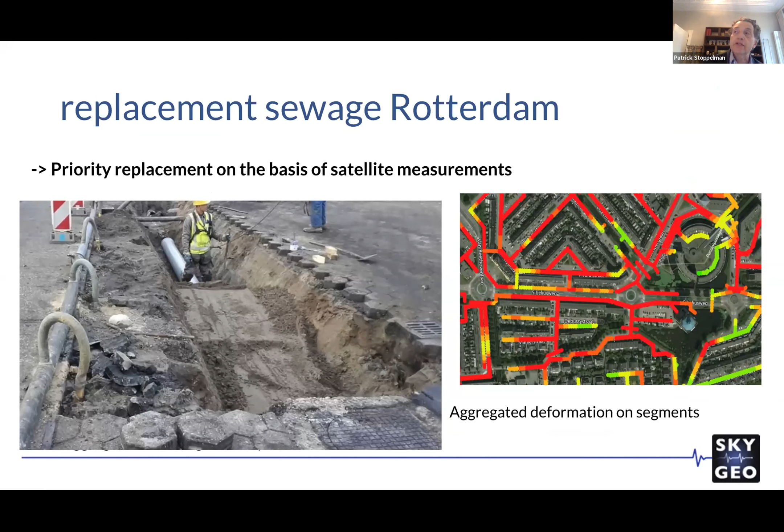Let's go to a large-scale subsidence in Yangon. So leaving the Netherlands, and here, with InSAR analytics, can we see what is going on?

In Yangon, we did this in collaboration with RVO, a governmental organization collaborating with the Department of Economic Development and Development Support for other countries. Here we identified a very unevenly distributed subsidence over a period of years, and we were trying to find out what's going on.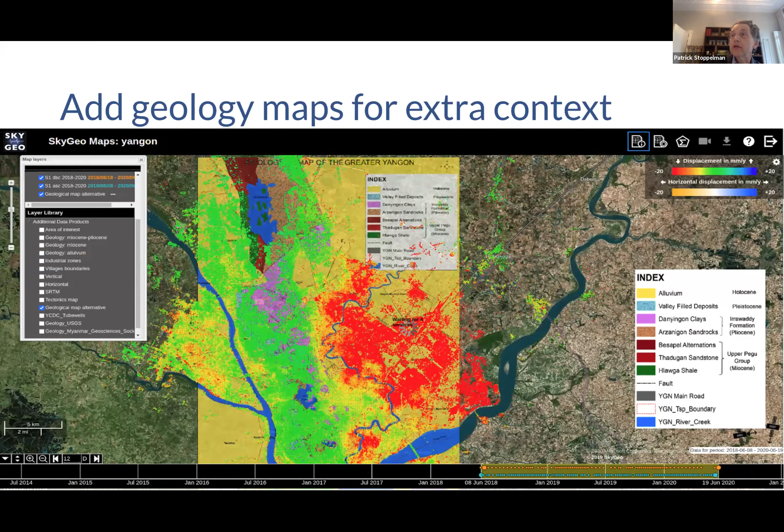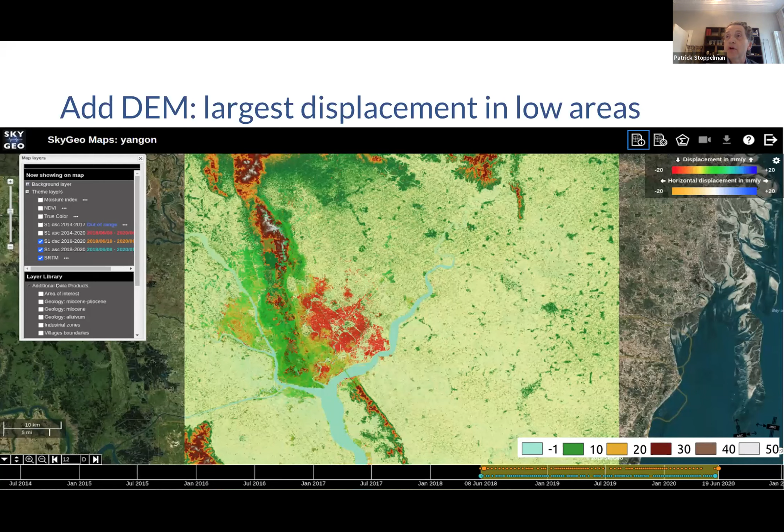We also added a digital elevation model, showing how the Earth currently looks, and we identified that the largest displacements are indeed taking place in low areas.

In the case of Yangon, this is information they did not previously have access to, so they can go back over a historical period of 2-3 years. This is all based on Sentinel-1 open data provided by the ESA.

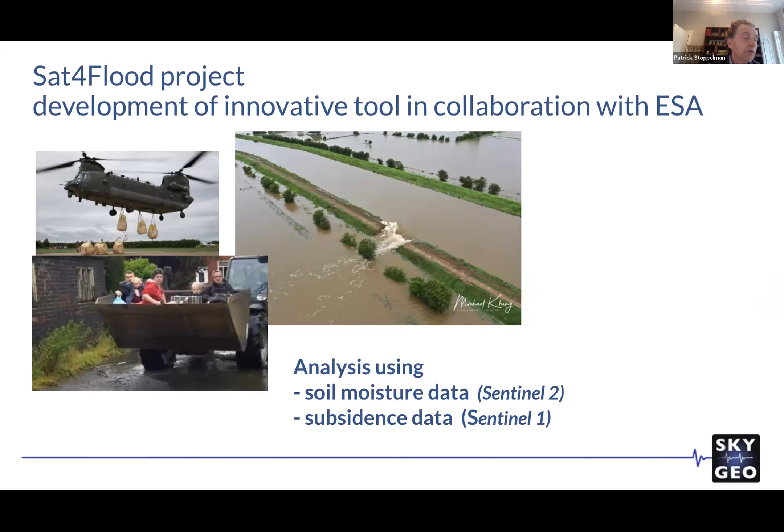Last but not least, I want to take a quick look at the Sat4Flood project. It's the development of an innovative tool in collaboration with the ESA, the European Space Agency. On the technical side, in the analysis we make use of soil moisture data from Sentinel-2 and subsidence data from Sentinel-1.

We did quite an extensive study of 20 or more objects. I'm focusing here today on the Edenville Dam in Michigan, USA. This is a satellite image after the dam broke—2,500 homes damaged or destroyed. For individual owners, a nightmare, of course, though compared to Mumbai still a small amount. But the damage was estimated at $175 million.

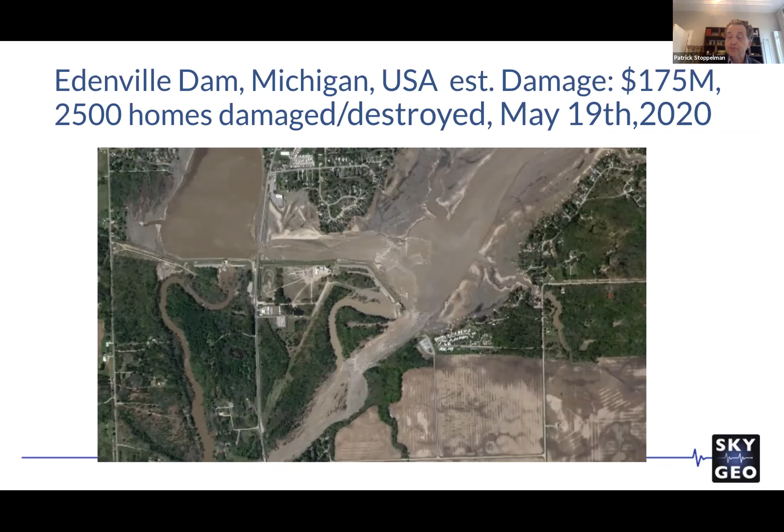There is a movie which I cannot display because the technology doesn't allow me, but if people are interested in seeing the actual collapse taking place, you can look on YouTube for the Edenville Dam in Michigan.

So I'm going to show a few slides. What you see here is a combination of soil moisture analysis and later subsidence analysis. With the red circle, we see seepage of moisture behind the dam in the winter from 2019 to 2020.

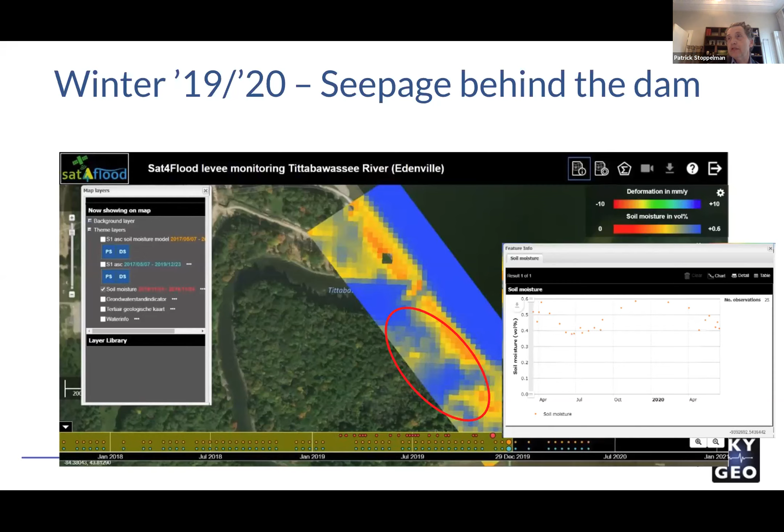You can also see in the graph that there's sort of an uplift, assuming the soil moisture is increasing. In September, before that, we see also that part of the dam is near saturation—another interesting observation. I have to admit, this is all in hindsight, since we never ran this as a monitoring project, but in hindsight, this was all detectable.

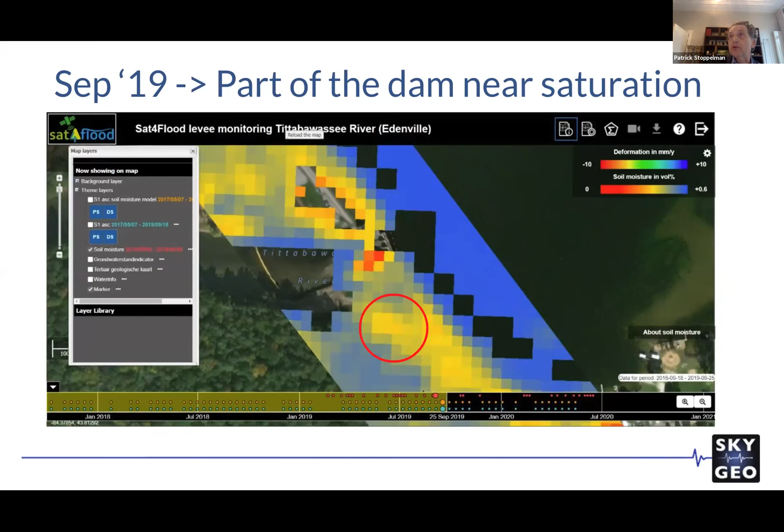And then we look at InSAR, at subsidence or uplift. Here we see a very uneven pattern, but we see something called bulging or swelling taking place, starting in August 2018.

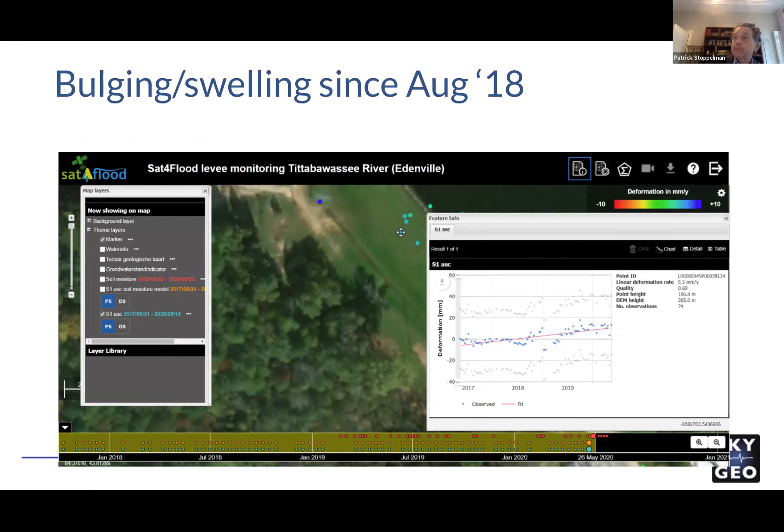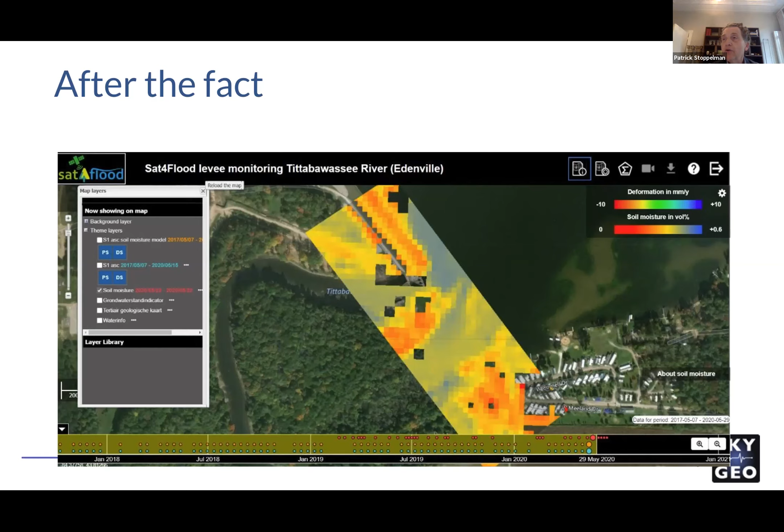And here, this is all after it - you see the event after the collapse. The reason I'm showing you these images is that satellites allow you to get better information on water defense structures and reservoir dams. They allow you to better understand underground infrastructure, and they can support policies for land development. Decision-making processes can benefit from this kind of satellite information. And this is where I end my presentation. Thank you very much.

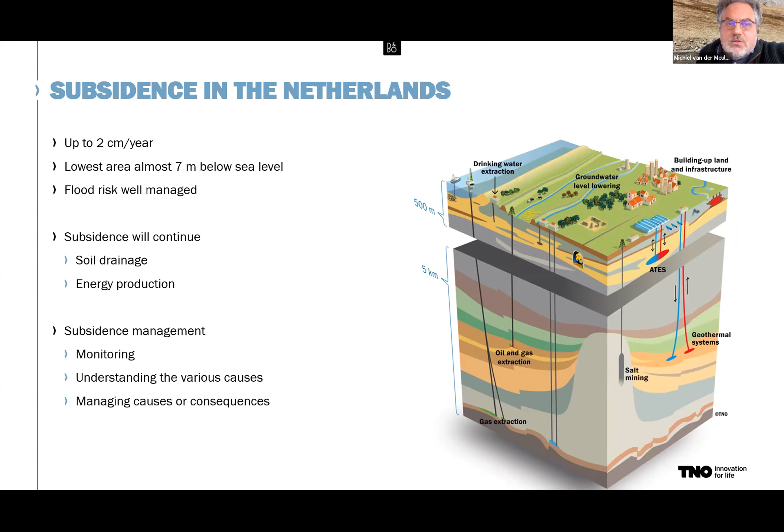So if you want to work on subsidence, data is everything. And as the Geological Survey of the Netherlands, we are lucky enough to be the host of many types of data that are relevant to this particular problem.

We know the geology of the Netherlands in 3 dimensions very well, because there are 2 laws in place that give us access to a wealth of subsurface data on all relevant depth ranges for this particular problem. So we know where the easily compactable soils are because we have drilling information. We have models, basically 3D geological maps. Apart from that, we collect data on groundwater, but also on mining. So basically the geology and several aspects of human interaction with geology, water management and mining, we have data available.

And next to that, we have access to all kinds of geodetic data. For example, the INSAR data that was introduced by the previous speaker. So we can see subsidence and we can explain it.

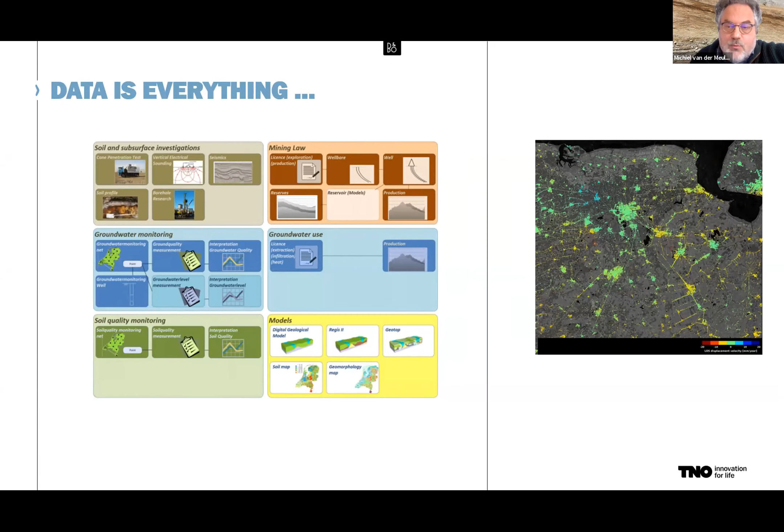What we need to do is translate our understanding of subsidence into models. So what we do at TNO, at the Geological Survey, is create various models of compaction. We know how much the soil will compact if you drain it, as superficial deposits, for example. And we have a similar kind of understanding of the compaction of reservoirs in the deep subsurface if you produce natural gas from them.

We have access to surface elevation data in very high resolution. If we understand the processes of subsidence, if we are able to model them, and if they explain the subsidence that has actually occurred over a certain period in the recent past, then we can use our understanding and the models to predict. You can say something about the subsidence in the future. So calibration of models with data is a key ingredient of how we tackle subsidence at the Geological Survey, and also make scenarios or predictions of the future.

The previous speaker showed that subsidence data is actually deformation data, and it comes in very high resolution. You can see on the one hand a regional subsidence, which may be caused by geological processes and people interacting with geology. And next to that, with INSAR, you are able to see the damage to even individual buildings or infrastructure.

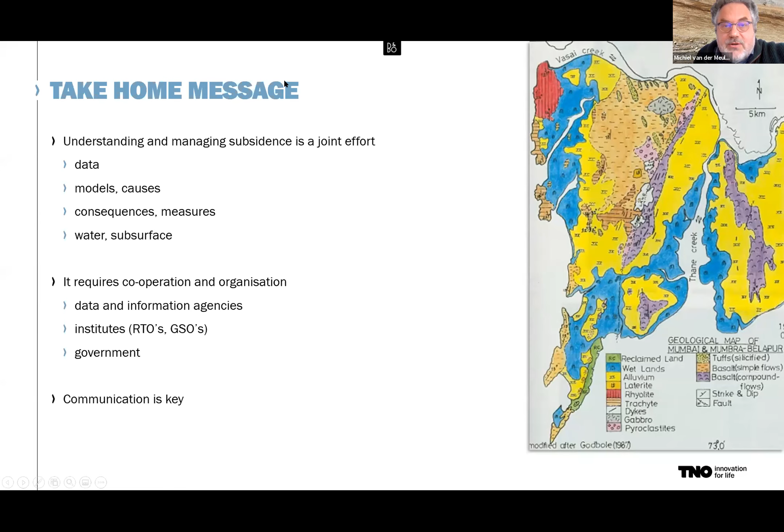Thanks for this wonderful presentation, and specifically the image at the end. We have a pretty long question for you that's come in. The question is that extraction from the Earth due to human activities appears to be the main cause of man-made subsidence. Then what shall be the remedies to fill such geological gaps? Once mapped, what would be the probability of future subsidence? Do we need to carry on mapping continuously?

Well, what you often see with geological mapping is that to understand subsidence, you need to understand your geology in three dimensions. It's actually a big effort. Over the relevant depth range, you need some sort of information, and you need to build that typically from boreholes and 3D modeling techniques to get a grip on it.

My experience is that geological mapping is never really done, not because geology changes so fast, but because data is always limited, and once you get more data, you have more insight. Actually, in the case of subsidence, it is geology that is changing, because people are making changes to, for example, the thickness of a layer, and it would be good to account for those changes in your geological model. It is typically not enough for subsidence, which is truly a three-dimensional problem rooted in the subsurface, to just have a geological map. You need some sort of 3D insight, and that is a big job.